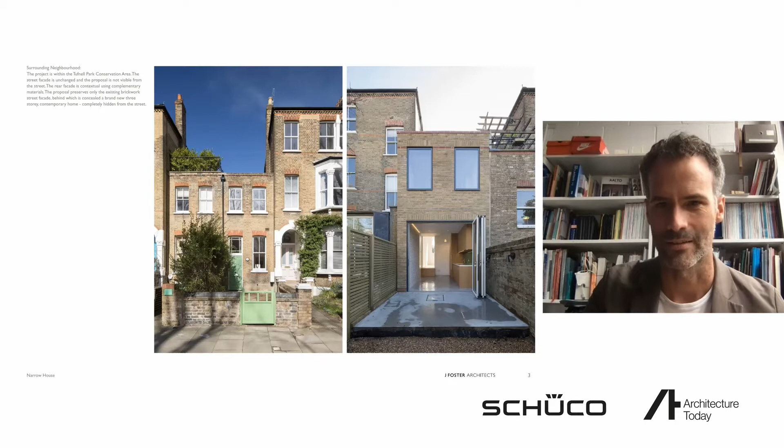Really, the ambition was to bring in as much light and the feeling of space in what is, you know, a very tiny plot. As I say, it's 3 meters left to right between the brickwork wall and the back of the kitchen units.

And there was sort of carte blanche actually with the aesthetics, so you'll see there's quite a limited palette of materials.

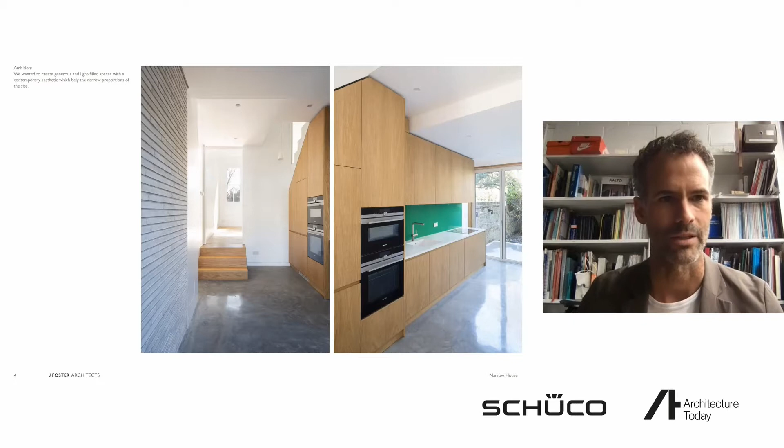The backstory is quite an involved planning process. It's a conservation area, and there are large houses next door that have lots of historic additions that we weren't necessarily going to follow. But actually the council was on board. We did a pre-application process, which started an early dialogue, which I always recommend, and that enabled us to maximise the volume and area we were able to put on this site.

The context is always important when you're making external changes, so we took on some of the existing brickwork details at the rear and incorporated those into our facades, and things like window colours and fenestration patterns.

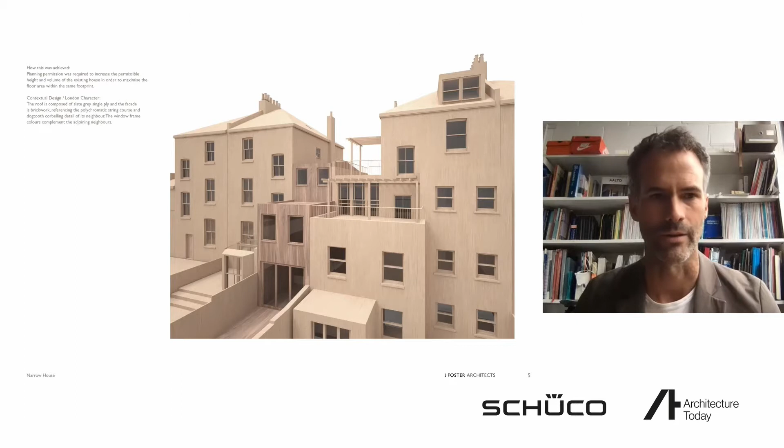Again, we deviated—we weren't trying to do traditional mimicry or pastiche, so they're sort of uncompromisingly modern. This is just really an idea of the mass we were playing with. These coloured blocks at the front are what we created, and that's how it nestles in between its neighbours.

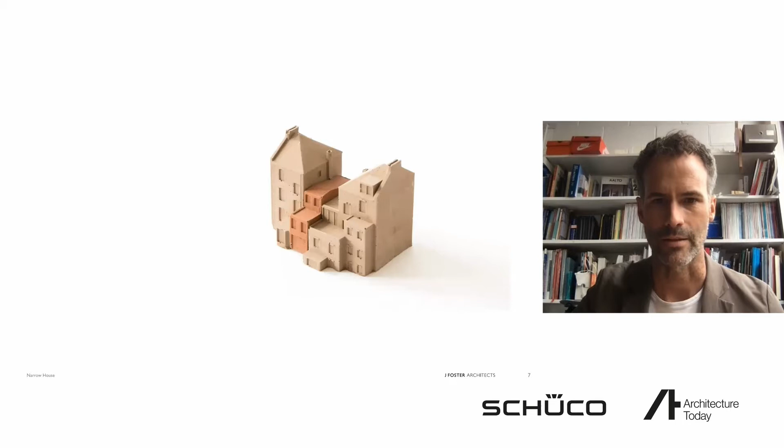So really an insight into how a project like this starts. It's a sketch, fairly crude. There's pencil crayon and Tipex, and it's overlay paper.

But the sketch that really got the client excited and got me interested was the level changes and how we could basically introduce a second floor into this tight plan. And this is really the concept that stuck, and you'll see in the end photos, was carried through to the end result.

The site, as I say, is north facing, so north is this side. So the two front rooms get lots of daylight, but the main rooms for the client, which were the bedroom, the kitchen and the study, don't receive any direct sunlight.

So again, the sketch is just showing, okay, well, how are we going to pull down light into the center of this plan to stop it being gloomy?

And really the split section also gave opportunities for storage. So the original house was 50 square meters and the new house is 70 square meters, and every square centimeter is used for something.

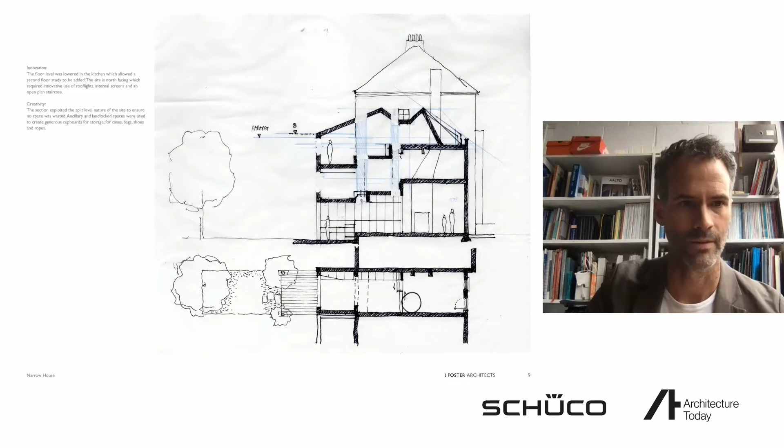So every nook and cranny, including ceiling voids and the bits left over from the split levels overlapping, became storage cupboards. I've said there for cases, bags, shoes and ropes. So the client is an avid climber, so he has lots of gear.

And this is just an illustration before and after of what we did. So we dropped the kitchen floor down at the rear, which is here.

There was an existing sort of basement void here, but the client chose not to use that, and that was really just driven by budget.

But we did use that volume at the back, and that allowed us to basically create 3 floor levels at first floor, and then sneak in storage voids, and then a study at the top floor, which is here.

So again, the staggered plan really enabled us, and you can see the kind of storage cupboards here, really just to maximize and optimize the area, whereas the existing had these enormous ceiling voids which were just dead space.

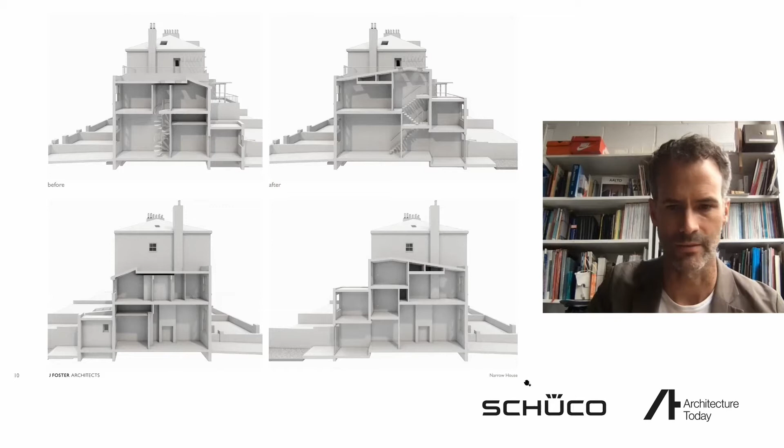So the original height of the front room was retained. So this is probably the height it was when it was a coach house. And that was important, so the memory of the original building at the front is retained throughout.

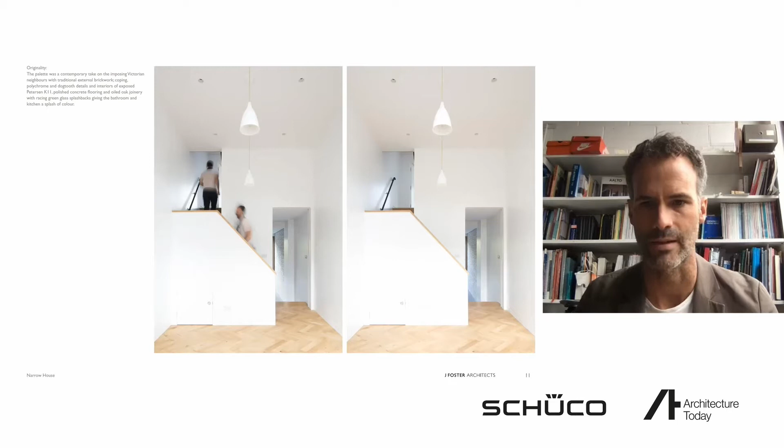But then as you go deeper into the plan, it's something altogether different. So again, you can sort of read the level changes here from the kitchen up to the main reception room, and then the stair up to the bedrooms beyond.

And that's just looking back. So again, really generous height, 3.7 meters there. This is obviously before it was furnished, but we basically kept modernized.

So slim light double glazing to the front, new front door. Every opportunity to improve thermal insulation and reduce energy use of the building was taken.

Acoustic insulation was improved to the party walls. And as I say, the front facade is the original Victorian brickwork, but everything else is new.

Some of the quirks of the plan: a glimpse through from the stair going up to the kitchen, which is stepped down. So you get some quite interesting kinetic views as you go up and down the stair.

And really incredible heights in the kitchen. So this is well over 4 meters, because we basically internalized the void below the second flight and given that over to the kitchen. So really having some fun with the section.

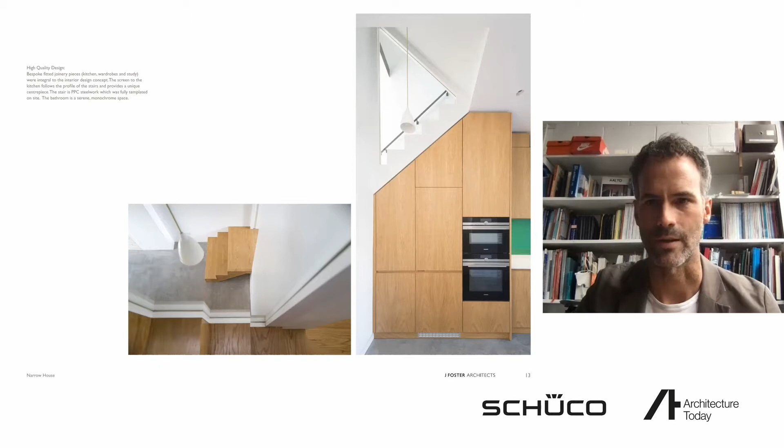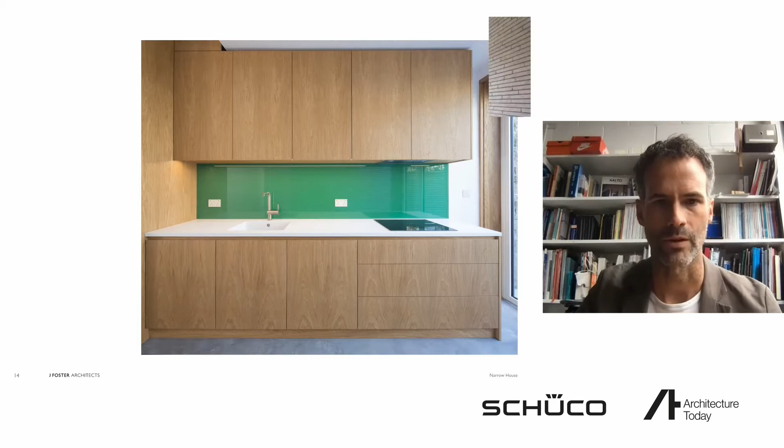The kitchen joinery is oak, the floor is polished concrete, and the exposed brickwork is Petersen. So really just a very stripped down palette, and again carrying the concrete out to the external patio.

So the house is designed along its axis, the north-south axis, to connect the ground floor spaces to the garden beyond, and it's quite a small garden.

There are pocket doors used throughout, again, just to maximise sort of useful areas of plan and not avoiding stagnating any areas with door swings. And this just provides a seamless connection from room to room.

The 2 front rooms, so that's the ground floor living room and the first floor bedroom, retain the original proportions of the coach house, but everything beyond is new and sort of unashamedly modern.

Circulation space is super compact, and again, this is just to maximize every useful square inch of the new 70 square meter house.

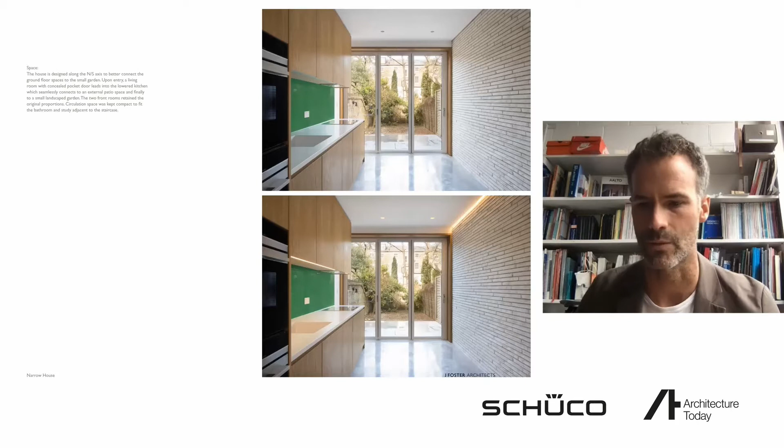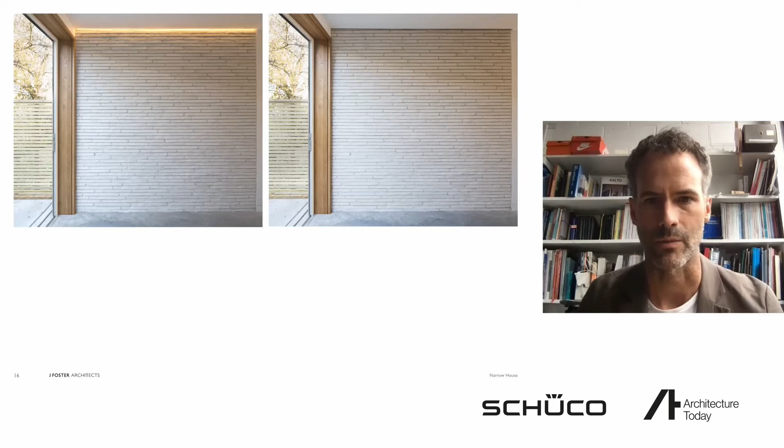And that's just some views showing, again, the connection with inside and out. So with the quite sort of earthy tones of the exposed brickwork and concrete, and then the connection with the sort of natural setting of the garden beyond, and the sort of interface between that is the oak.

And this is carried up, so the bedroom above the kitchen, the same brick wall carries up and is exposed there. And again, this just complements the slightly more warm oak flooring in contrast to the gloss of the kitchen.

And really the bedrooms are very sparse. The client wanted to avoid the use of colour but maximise storage. So there were built-in wardrobes in all the bedrooms, sockets and switches in very generous quantities, and the fitted joinery is again just very monochrome. Recessed skirtings, again just to maximize area. Very discreet lighting, and we're just trying to achieve a crisply detailed, clutter-free space.

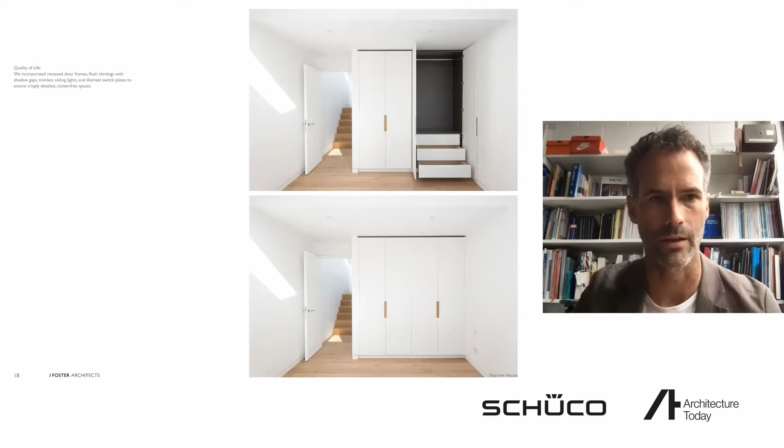So that's the bedroom. The key to getting light in, although this is the south-facing bedroom, was to introduce several roof lights. The bedroom had two, which are motorized, and these can be linked to a BMS to aid with ventilation if linked to internal thermostats.

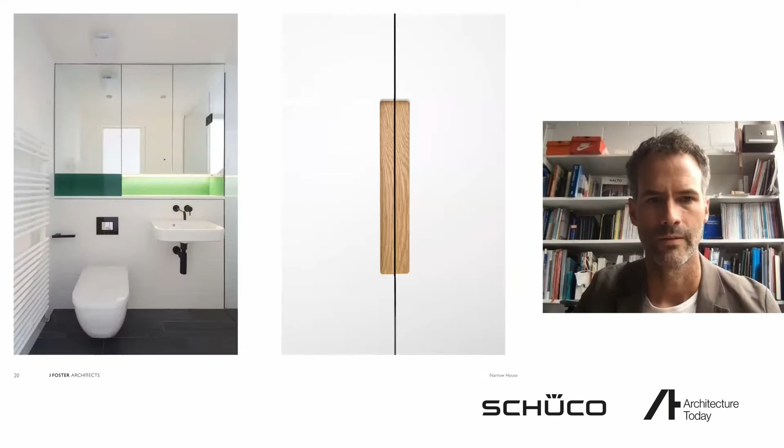That's just back to the detail. The stair also had two large motorized roof lights, but these were combined with an opening switch, which were part of the fire strategy. So the only reason we had permission from building control to have an open plan escape stair, which is the main stair, was because we had a mist system combined with these opening vents.

So I'll just go back. This is the staircase, which goes through the center of the plan. You can just see the internal screen there, which looks down into the kitchen. That's the view back to the front door. And then this goes up to first floor level.

And then that's the study, which is our second floor level. And this works quite effectively. Despite it being a north-facing window, this space always has light and is top lit, and that pulls light through down. There's another internal screen to the shower, so there's natural daylight to every room in the house.

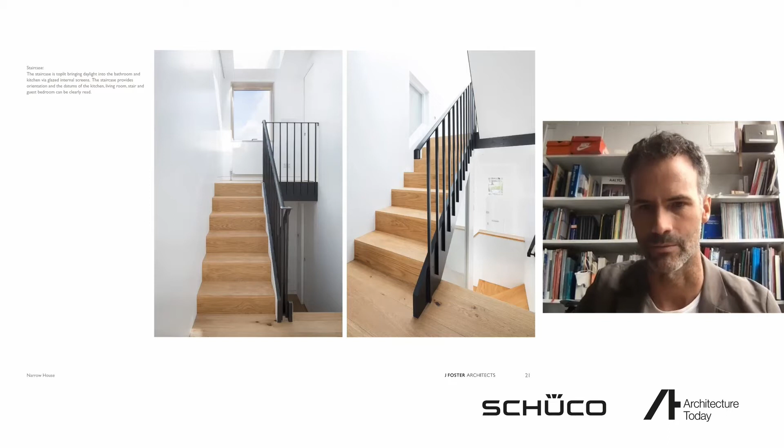And again, that's just a very compact stair. The favorite space of the clients, which has become essential during lockdowns and post-pandemic, is the study, which the client had wanted all along, and it was going to be a library and home study space. But then it's since become the quintessential home office, which has been absolutely essential.

And again, just very simple, some built-in worktop and shelf storage. And again, this is more integrated storage. That's a large sail loft for ropes and climbing gear and camping stuff.

So it's worth just speaking about what I've termed the environmental considerations. With a house like this, it sits between two party walls. We're retaining the front facade, so it's really only a new roof and a new rear facade. These were super insulated, timber floored, timber framed and sheathed throughout, brick clad at the rear, and the new windows - Slimlite double glazed sash at the front, and then composite thermally efficient windows and bifold doors at the back.

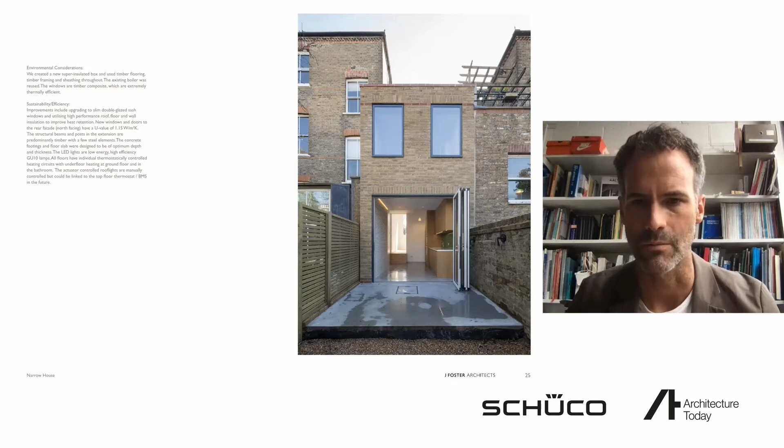And the intention there was to maximize the thermal efficiency and reduce energy use where possible. But then going beyond this, the roof lights and the fact they can be linked to a BMS or internal thermostat leaves the potential for a passive heating and cooling strategy in the future. LED lights were low energy throughout. And again, the structure was optimized to minimal thicknesses and depths, partly to do with material use, but also impact on party wall awards.

That's just a view at night. And really a post-occupation appraisal was an interview with the client. In summary, they're very pleased with it. They got a lot more than they bargained for. They originally just wanted a back extension, but we ended up demolishing 95% of their house. But then the gain is an uplift of 20 square meters of their original house. And really the footprint and the spaces are tailored to them and their uses. So it's really, the way I see it, a bespoke, customized set of spaces, like a well-fitted suit.

And it's just worth mentioning, obviously, the end result compared with the original building. There's a 9-month process there, and really the unsung heroes are the makers and the site team. So I've prepared a short burst of images, which should hopefully summarize this process.

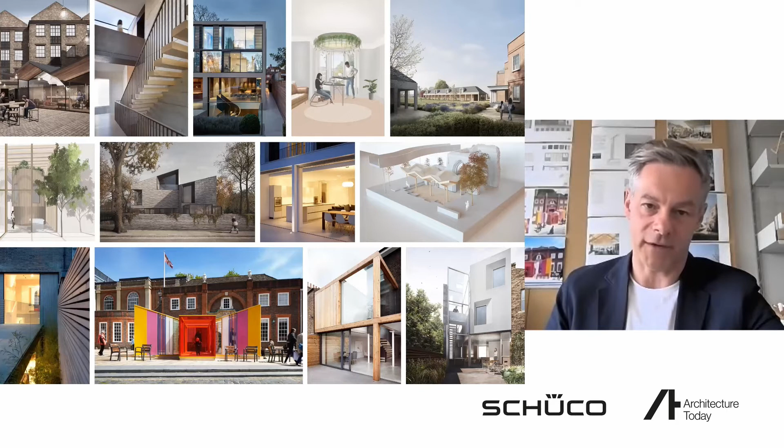I'd like to talk to you today about the work we've been doing on the residential side of the business. This is just a very quick selection of a few of the projects we've worked on over the years. There's a mix of cultural, commercial and residential projects here, but the main focus today will be on the residential work we've been doing, and how we approach projects and brief formation with the clients, and how we arrive at the projects we have, having discussed the requirements and aspirations of the projects and the buildings with each individual client.

So as a practice, there's a few key words that we really like to come back to that we use, and they're really key themes for everything we do within the business. We like to explore design around each of these key themes, and I think that really helps us articulate some of the ideas that we come up with, and certainly helps clients understand what it is that we're driving at, and where the design ambition comes from.

So with the first one, craft - this is also, I forgot to say, symbolised by a nice object that I have actually here, and that was given to me probably about 30 years ago, 25, 30 years ago, when I worked at Hopkins & Partners. And it typifies a number of things for us - a craft of how things are made, the beauty of an object like this, which I think you'll see in a lot of the details that we have within the practice.

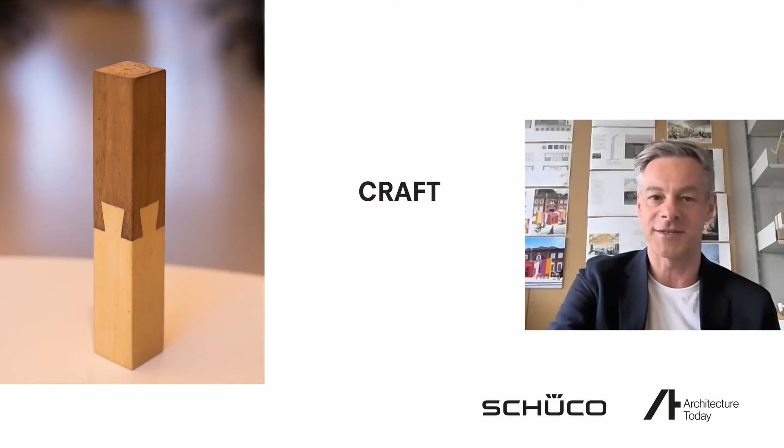So, to do with craft, we like to make things and detail them in a particular way that has rigour, beauty and elegance. There's a number of ways of doing this, but it's about simplifying material choices and understanding how things are made and constructed. That's really key to the essence of the buildings we make, and the detail is critical. But it is about making, ultimately.

To achieve that level of precision and detail takes an awful lot of skill, not only in how one draws that, but also having a contractor that understands and interprets the requirements of the architect's vision, and ultimately the vision of the client, because we're designing homes for people. It's important that we articulate that vision and take the clients on a journey through the design process of discovering what's important for them within the building, and being able to articulate that in an elegant and meaningful way.

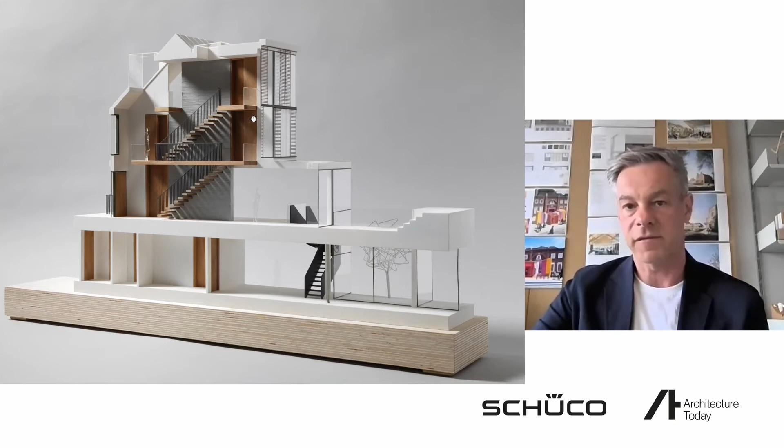This is a section through the same house. You can see the boardmark concrete wall running through the property, the cantilevered staircase, the light-filled dormer at the front that brings light right through the building, and the triple-height voids at the back, which also take you down to the basement level.

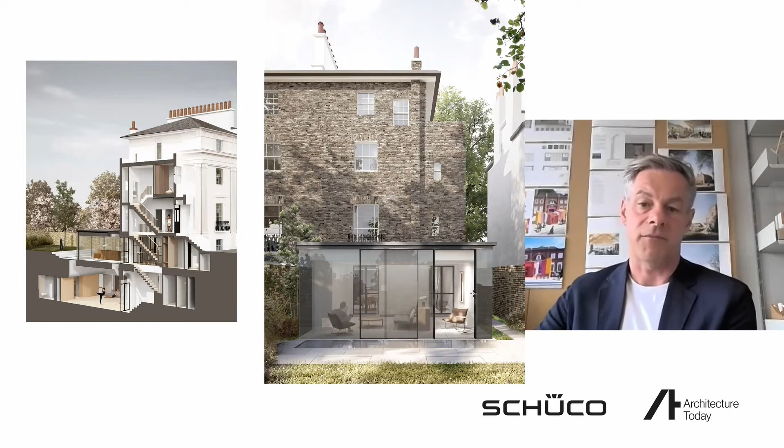This is another Grade 2 listed house in West London, with a basement underneath the rear garden and a new extension to the rear. The extension had to be very sensitively done given the nature of the listed building, with a lot of original features remaining, so opening up the rear was quite a challenge. We maintained the opening to line up with existing windows above, and created a lightweight, elegant glazed extension to the rear, along with a floor light that brings light down into the basement.

Light is another important theme for us. I've mentioned it a number of times describing our work, particularly in this country, because it's important to maximize the amount of light we bring in. But light also plays another important role: connecting the user from inside to outside. We're trying to reconnect the exterior and interior, so that the garden becomes an extension of the inside of the house.

By bringing the light in, we know that it enhances well-being. We know that connecting with nature is a really important aspect of creating architecture for one's well-being. So it's really important that we consider light as a theme and as a word in everything we do from the outset of the project.

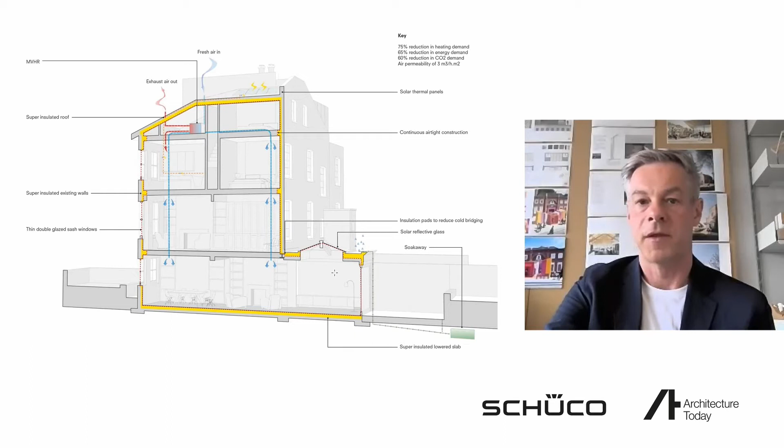We're also applying this to another project in Ealing at the moment, and this is about to go on site. Again, we're upgrading this to an EnerPHit standard, and this particular client is actually taking this to the next level, looking at lots of aspects of well-being within the project and the house. So removing noxious gases, VOCs from paints, formaldehyde-free MDF, not using any phenolic foam insulation, replacing with cork, trying to go for environmentally sustainable concrete. They are trying to consider everything as they can within these properties, and it is evidence and proof that we can do this within these projects.

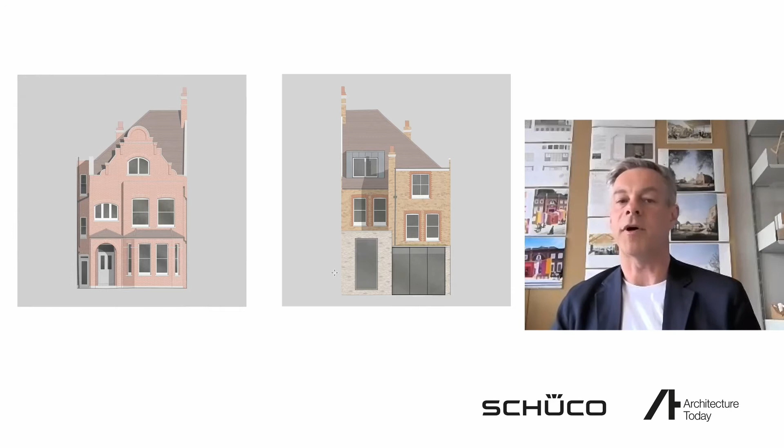I think if you're considering a project that goes right way back to the bare bones of the house, and we're taking the structure right back to the brickwork, the extra over cost of putting these additional features in isn't that much more, given the extent of refurb that would have to be undertaken in any case.

Ben, congratulations on an outstanding portfolio of work there.

The stairs are a particular star of the show of many of your houses. Is that a particular theme that you bring out in lots of your projects, with some beautiful staircases?

Yeah, we had a project the other day where a client came to us asking for a new staircase, and the house evolved around the staircase. So it was something quite interesting - it can start from something quite small, but we do love a staircase, it's true. There's something very sculptural about them, very simple to connect different levels, and doing it in a very elegant way is always an interesting challenge.

Yeah, very much sculptural staircases in your work. It's a lovely theme, and some outstanding examples there.

Energy efficiency was another theme that's come across very strongly in your projects. Now, is that driven by you, or are you finding that's driven by the clients?

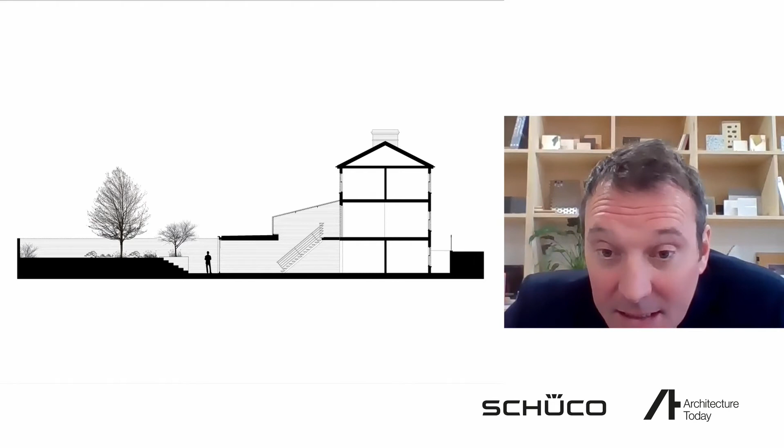We always try to bring, I mean, natural light obviously is essential, but views are so important too. So we try to think about what do you see as you walk through a building? Whether you see into one room, what do you see beyond that? Maybe you see through that room to a window, or to the outside, to hopefully see some trees or sky. We're always conscious of that sort of thing. It's about views and organisation of spaces.

Next image, again, hopefully helps explain it a little bit. You can kind of see the balcony up there, and then the staircase coming down underneath the glazed roof. The main house, or the original house, is to the right, and the garden's to the left.

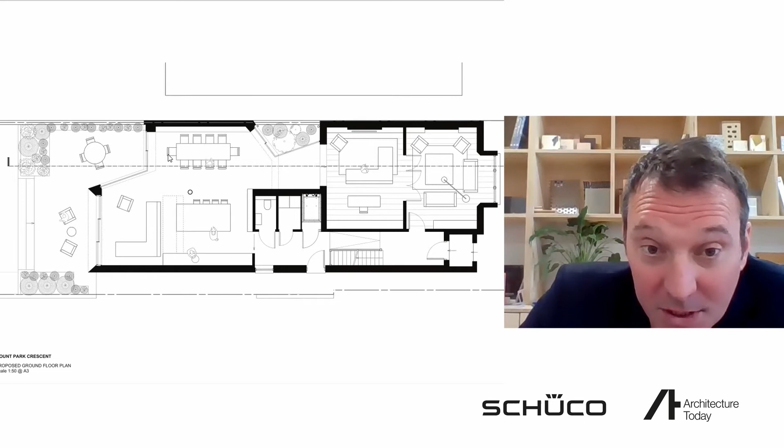We're standing over here by the dining table in that view, looking towards the kitchen. But you also can see the kind of outside spaces.

You've got glazing in between, done by Schüco, and then glazing in the roof to bring natural light into the kitchen spaces. When you build out across the back of a building, you potentially reduce the amount of light coming into the middle of the building, so we always have to consider that quite carefully.

To give us those angles and shapes, there are different materials we could use. We were quite keen to try concrete because we thought it would give us the opportunity to create slightly more sculpted elements, hopefully in a semi-seamless way, although obviously there are some seams. Anyway, that's what we used there, cast in situ.